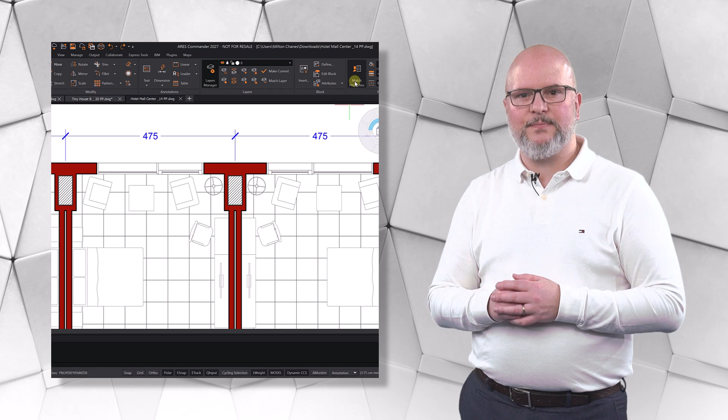Number 1, Property Painter across drawings. Property Painter has been extended to work across multiple drawings. You can now copy properties from an entity in one drawing and apply them directly to another entity in another file. This includes not only standard properties, but also dimension styles, text styles, hatch settings, and more. This helps maintain consistency without adjusting styles manually in each file.

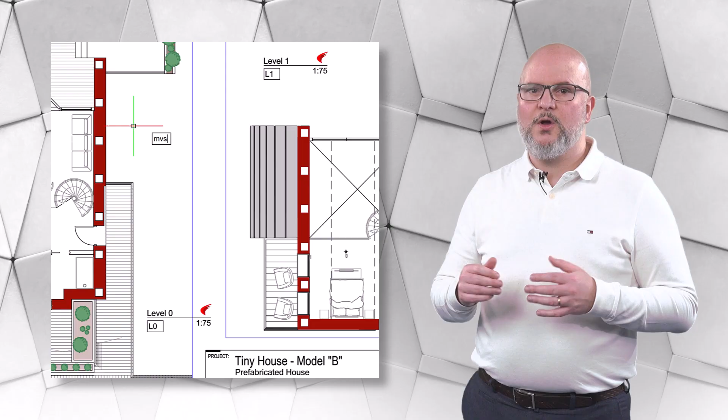Number 2, MV Setup. MV Setup is now available to assist with layout setup with a workflow familiar to AutoCAD users. It guides you through key steps such as defining units, setting scales, inserting title blocks, and creating a viewport, especially if you want to print from model space. This is actually a very old command in AutoCAD, but it reflects our commitment to offer a very easy transition, because users can simply use any command they know from the past.

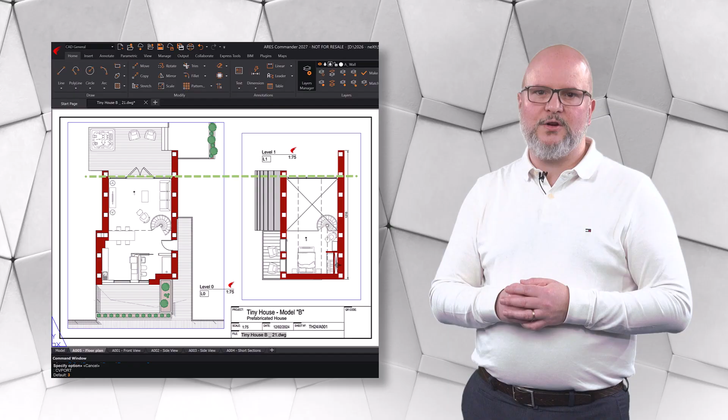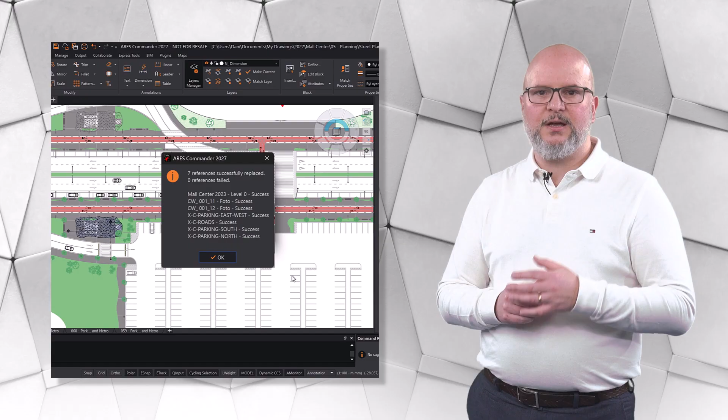Number 3, Xref Batch Update for missing references. External references get easily broken when they are renamed or moved, so we introduced 2 improvements. First, Ares Commander provides warnings when relative paths may break, for example after saving the file in a different location. Secondly, when references are missing, you can now update all paths in a single step from the references palette instead of handling them individually.

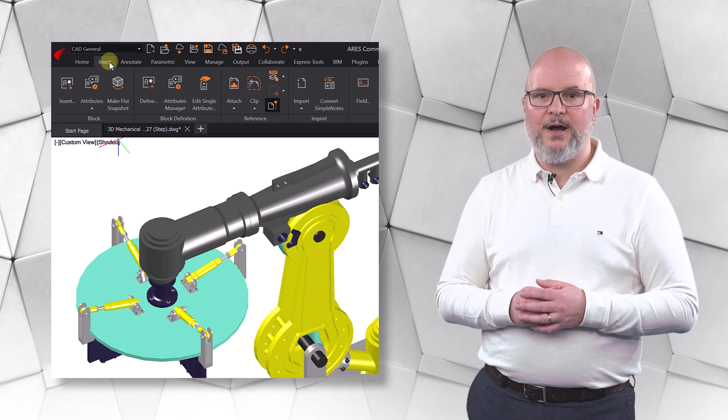Number 4, DWG to STEP export. Ares Commander now supports export to STEP format, a widely used standard in 3D CAD and PLM environments. This enables direct exchange of geometry with solutions such as SolidWorks, CATIA, Creo, or Inventor. Combined with existing STEP import, you're now both able to import and export to share in both directions with 3D software.

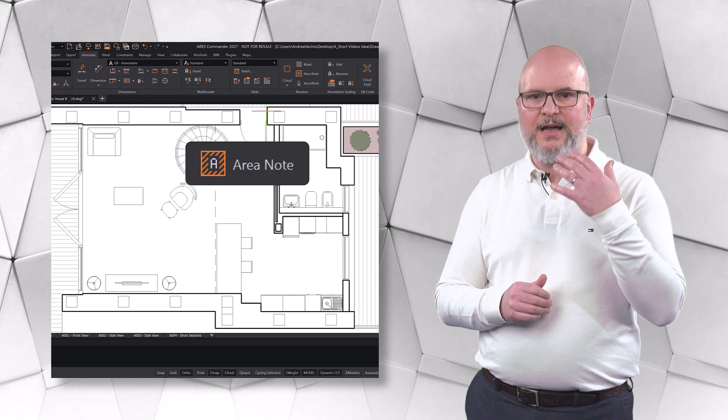And number 5, the Area Notes. Area Note introduces a dedicated workflow to calculate and document areas directly in the drawing. By selecting a closed area, the software automatically calculates the area, applies a visual fill, and adds a label with the measured value and optional description. With options for styling, transparency, and numbering, it's a great annotation tool that is an exclusive feature in Ares.

Together, these improvements support both a smooth transition from other CAD environments and more efficient handling of everyday drafting tasks. That's our top 5.